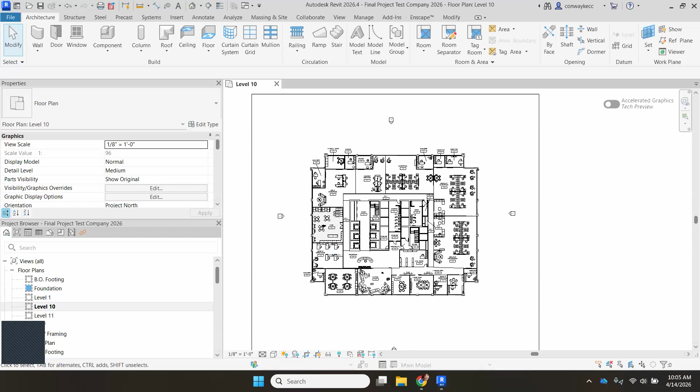If you've been following along and on track, you should have all your room tags in here. There is a kind of behind the scenes trick to copy and paste them if you haven't done that, but ideally you'll have all of your room tags on here. So it's a bit easier and faster and less work to set up your drawings. So we're going to check a couple things first. So first you want to make sure you're on an 1/8 inch scale.

Then we're going to put in a north arrow and a bar scale. Mine are already preloaded, but I'll remind people of where to go for that. So you're going to go up to annotate way up here. It's about halfway through in your toolbar. You're going to go to symbol. If you don't have it loaded already, you're going to go to load family. So mine are kind of going to come down here in this pop-up menu here. But if you need to load them, you're going to go to load family, click on that.

And then you're going to go to your annotation folder. So if you're not here at the root US one, make sure that you've scrolled back up to the US one, and then it's that first one, annotations. The two things that we'll need are right here. They're not in any subfolders. So what you're going to need is a graphic scale. So there's two ways we can do it. I'll put both in so you can see, but there's the GA graphic scale, looks like that. Then there's also the graphic scale for 1/8 of an inch.

Then you'll also need to add in the north arrow, and we have 3 options for that. Again, whichever one is your preference, they're all correct. So mine are already loaded, so I'm just going to hit cancel. So the first one we'll do is the north arrow. Here's the one I picked. I'm going to put it kind of over here to the left. Now, when you go to do your floor plan, you're going to need to leave some room for dimensions, so you might have to move this around later.

I'm next going to do the graphic scale. I'm going to show you both of them here. So to do this again, we're still on annotate. We go over to symbol. Now we have the drop down menu over here. Here's the 1/8 of an inch scale one. So some people are putting it just like right there. Then I'm going to show you the other one because there's a slight difference in how you have to force it to be an 1/8 of an inch.

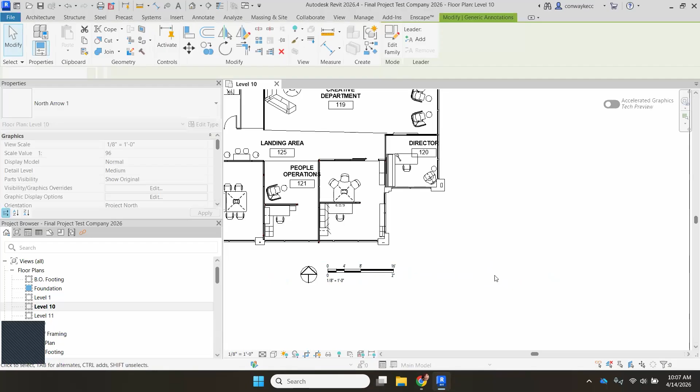And then now we have it an 1/8 of an inch. So whichever one is your preference. I just like this one, but both are fine. So whichever one you want. You don't need 2 of them. You're just supposed to have 1. So put that there. Then there's a few things we're going to clean up.

So if you zoom in here, these are the room separators to make my room tags. So I'm going to click on one, right click, and say hide in view category. This is a newish model that I've been updating. So the next thing we need to hide is the flooring. I only have like a sample flooring in here.

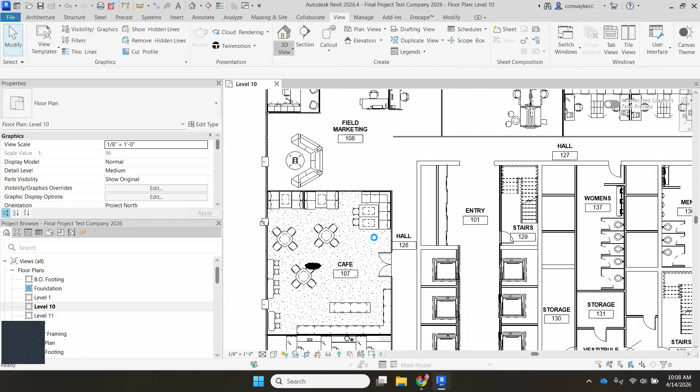There's a couple ways to try to get it. You can kind of hover around. Some people have carved up their flooring in really neat shapes, so sometimes you can get it that way. In my case, I'm going to kind of go into a view here. So this is kind of one of the roundabout ways to do it. View camera, go from here to here. Try to get where you're looking like out a window, because then you can get the edge or perimeter of your flooring here, and see how I can kind of hover, and now I've got the floor.

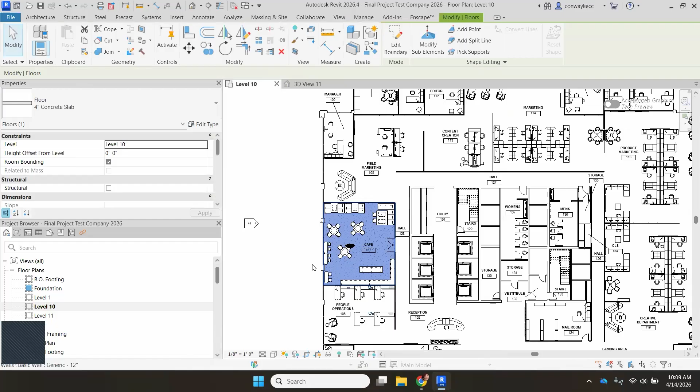So I'm going to go back to level 10. It's still lit up. I'm going to right click and say hide in view category, and now all of your flooring patterns should be hidden, because for this project, we are not doing a floor finish plan. We did it for project one, but for this one, we're just doing our construction stuff.

The other thing to note is just look around for any oddball stuff. So this is like a light fixture I was helping another student with. So I'm gonna just hide this one also because we don't want this showing up in the plan. So we're gonna say hide in view category, or actually for this one, element, just because I think whoever built this, they might have made it as a furniture. So eventually we're gonna say hide in view element.

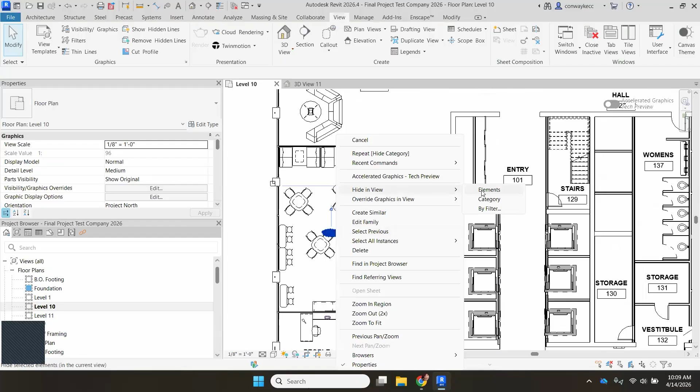I want you to also hide any of your plants, any like little area carpet rugs. A couple people had furniture and office sets that came in with a little area carpet. Hide that. Again, depending on how they've coded this, your plant may have been coded as furniture. So then you're going to have to go around and hide it by element, meaning an individual element.

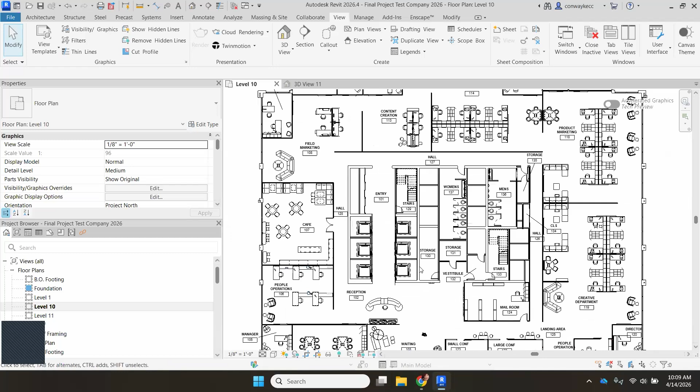Actually, here's a good example of these guys. This is a couple Enscape things. So I'm going to right click, hide in view category. I think it will get rid of all the Enscape stuff here and also here. So if you've already started putting in some Enscape elements, hide those also. So now it's basically as clean as we want it to be to start making some copies.

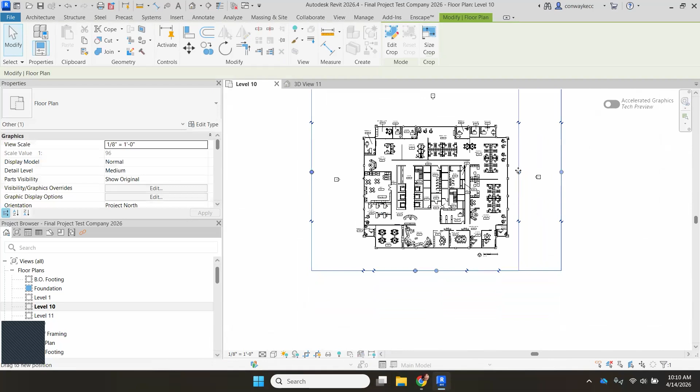I'm gonna, while I'm here, kind of pull this crop box in a bit more because we're gonna eventually need to have them all kind of edited. So I'll take the time to just sort of crop it in a bit more here. Note that when we go to put it on our sheet, the top and the bottom are pretty tight. Left and right, you have more space. So I'm gonna go like this, pull it in here, then pull it back over to the right. I'm going to tighten up the bottom too, but we'll pause that so you don't have to wait for things to save.

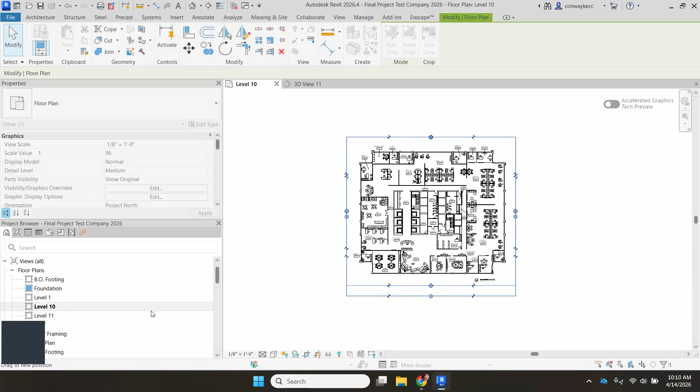Okay, so now this one, I'm going to leave this border on so we can see it, but now we're going to copy this twice to make our floor plan and our furniture plan. So for level 10, we're on it now. We're going to right click and we're going to pick duplicate view, duplicate with detailing, the one in the middle. A couple folks tried the as dependent. That creates a bit more headaches when things are edited. And so that's not what we want right now. We want duplicate with detailing.

And then it's going to come up just over here as like a new drawing. Now, so it's level 10 copy. So you're going to rename it and you're going to make this first one all caps floor plan. All right, so we'll kind of click off of that for a minute.

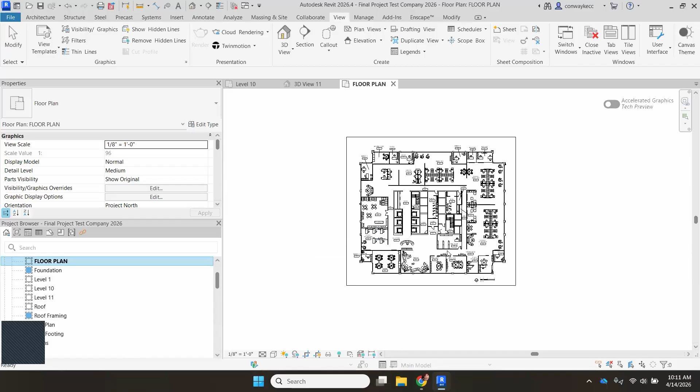I'm on it here. So for the floor plan, we want to now turn off all the furniture. So there might be a couple categories. So they might be under furniture, they might be furniture systems. Basically, you want everything turned off except any of the cabinetry in your kitchen or any cabinetry that might have sinks.

So for your mother's room, you might have a kitchen cabinet with a sink. That's correct to have on this plan because the plumbers and the folks who are coming in on the first wave need to know where these things are.

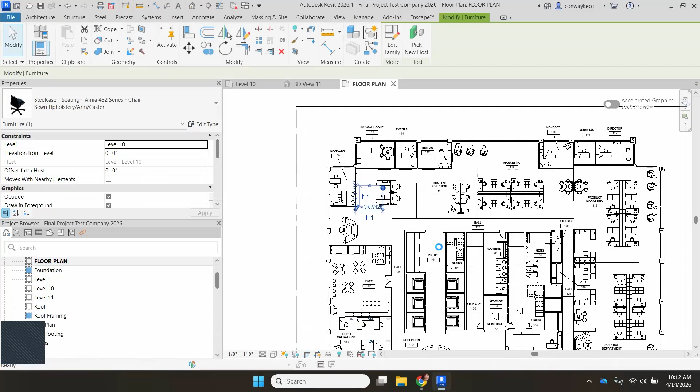So first I suggest is click on a chair, right click, say hide in view category. And on mine, you're going to see a pretty good amount of stuff disappear, well, actually pretty much all of it. So if you have other things still floating around like tables and chairs, they just might be categorized in their own separate subcategories. So you're going to hide that too.

But this is what it should look like, pretty blank, because this is now the plan that you're going to put your dimensions on. So for my students this semester, we did all this work on Monday. Their first round of draft dimensions are due Thursday. So we expect at least half of the building done, so I can give you some feedback and then you're able to finish them up on your own over the weekend. But you need to dimension obviously all the outside rooms and areas.

The other thing to make sure of is we need all these clearances here. You also should be dimensioning the length of these walls. So the clearance, the length of the wall, the clearance, how far away this wall is from an exterior wall or another solid wall. There's a couple quirky things on here too, so just go in and look and see what that is. You might need to hide it.

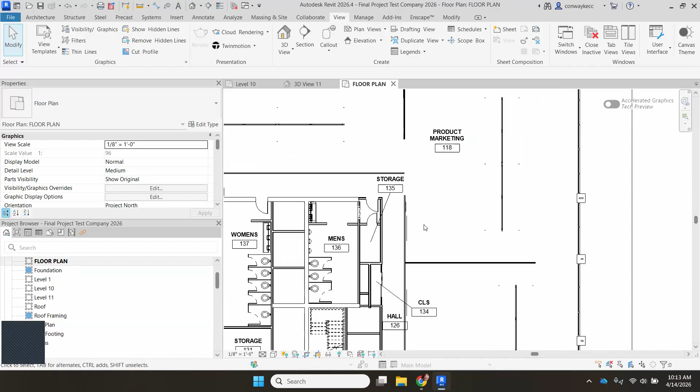But again, usually I tell folks to start in the top left corner and work your way around clockwise, but be really methodical. Again, more dimensions are better than less. You do not, however, have to dimension anything in this core part of the building because this already exists. You're not changing it as the tenant, so all of this stays just as is.

You're not dimensioning anything. You have added some doors and things like that, so I would add, obviously, the corridor width here, but you might actually be adding in some notation about the door too. We'll talk about that more in class. All right, but this is kind of the guts now for your floor plan. Now, I'm going to tighten this up even more. When we see it on the plan, you're going to see it's going to get pretty tight.

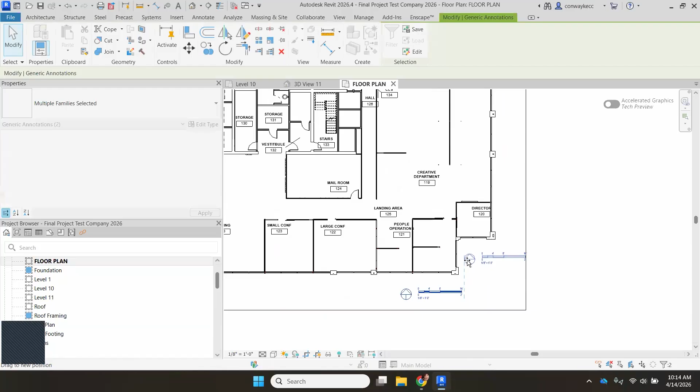You might want to move, we kind of discovered this in class, this setup over to here to the right, and then we'll watch where it's cutting off, because once we got it on the sheets, we were able to see how much space we have left. So for now, for this stage of the project, leave this crop box on until you're done with your dimensions. Then you're going to turn it off. I'll show you how to do that next in the furniture plan, so we'll set that up together too.

All right, so now you're going to go back to level 10. You're going to right click. You're going to say duplicate view, duplicate with detailing. And then it should already have the north arrow and the bar scale. And in this case, I might just leave it there. So here we have the crop box on. We're going to crop this as tight as we can here, to the right and the left really tight too, because this plan is now all done.

If you do have plants, I want you to turn the plants off and the rugs because they are not part of our furniture plan. They're more of a decorating aspect that you'll bring in after all the furniture companies have been in and unloading their stuff. So this is really the map, not only for the client to see where things are going, but later down the line as furniture gets delivered, so folks know where to put it for you.

All right, so for this one now I'm going to turn off the crop box and we'll later on see how it fits on the sheet, but we can come back and turn it on and off. All you do is just click the little button to the left of the eyeglasses. And now this is all clean, ready to go.

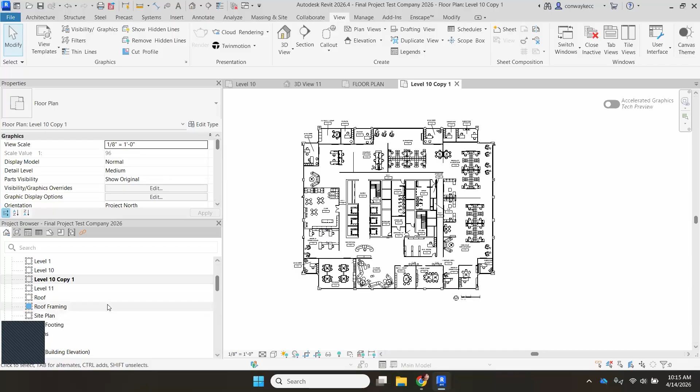All right, so before you leave this one, make sure you also rename level 10 copy. So that's going to be right click. You're going to hit rename. You're going to put it all in caps. So it's furniture plan.

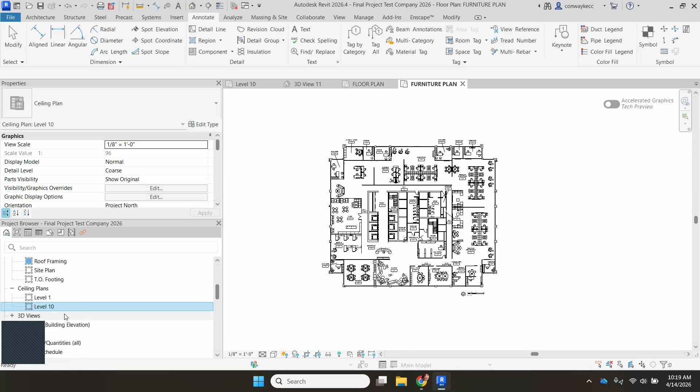All right, now we're going to move on to our reflected ceiling plan. So I kind of have a couple down here. So let me just get rid of this one that we did in class together. All right, so for this one, I'm just going to close these guys up now just so they're out of the way. You're going to right click on level 10 and say duplicate view, duplicate with detailing. And then we're going to get a duplication of your reflected ceiling plan.

Before we leave that one, right click and rename it RCP. So I'm going to click rename and then RCP in all caps. What we were trying to do in class is some people tried to rename this RCP, but then what happens is it renames your level 10 up here because they're linked. So Revit has a reason for having these things labeled as they are. So you're supposed to be making a copy of this.

So here's our reflected ceiling plan here. So if you have a lot of stuff floating around in the outskirts here, you might want to delete that. Or you might want to make sure, like I said, when we crop it, it's over here, but just keep an eye on if you have a lot of stuff. I'm going to leave mine there for now.

All right, you're going to go to the left of the eyeglasses again, turn on the crop box, just so we can kind of see the border we're dealing with. Mine's going to be pretty big because it's trying to be helpful and be like, hey, don't forget this stuff over here. So I do want to pull this in a lot tighter.

One thing to note is where these little elevation markers are, they were sometimes giving us some problems in class. They sometimes override other settings because Revit sees them as something that's very important because it sets up all the exterior elevation views. So what we were finding is if we move them in close, like about here, and then we cropped it, they weren't giving us as much trouble. So they're not showing up on our plan because we shouldn't be seeing these symbols on our plan, but we want to bring them in a little bit tighter.

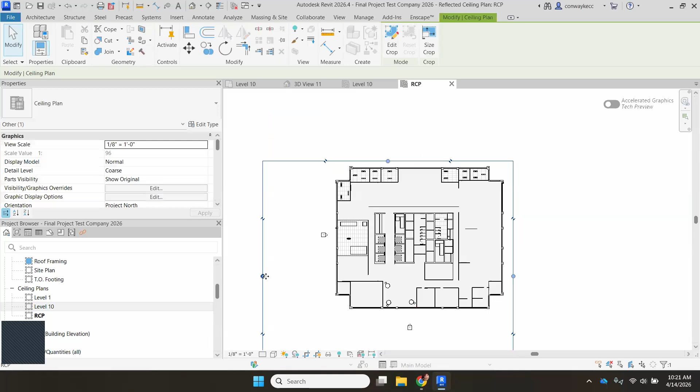We are not expecting you to dimension this plan this semester. Some semesters we will have you do that. Again, we're running kind of tight on studio time this semester. So there's a couple things we're kind of letting you get away with. You will be doing a lot more dimensioning in your lighting class in the fall semester. So that will still be something that you'll be learning and going over with Anthony.

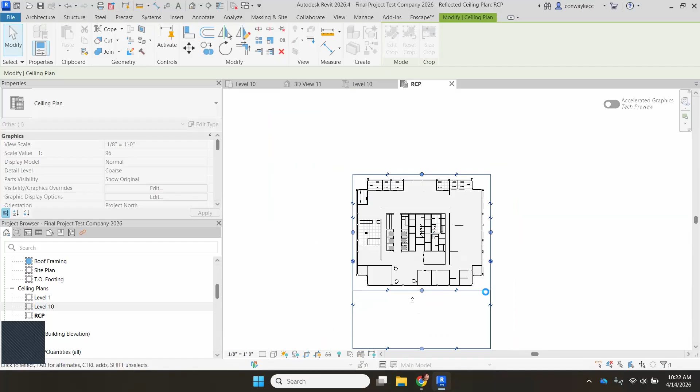All right, so now it's pulled in tight. And then before we leave this drawing, we need to put in the north arrow and scale here too. So I think I have enough space to park them here. So I'm going to go to annotate, then to symbol. And then I'm going to put my north arrow in first. So it's right here. And I'm going to stick it here. I might need to pull it over to the right a little bit more, but we'll check that in a minute. Then I want my graphic scale.

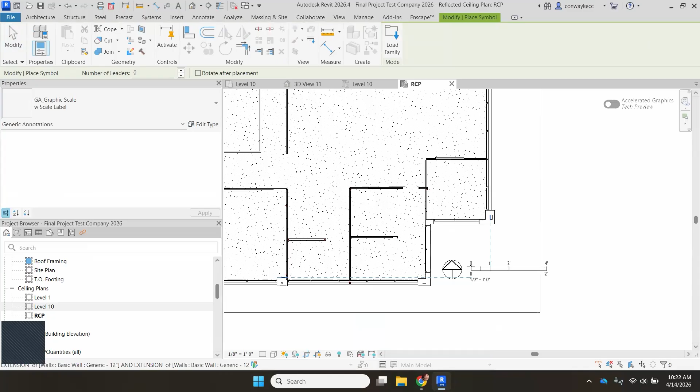So I just visually like this one a little better. Yep. So first we're going to make the crop box a little bigger for it. And then we're going to update the sizing of that so it reflects that it's 1/8 of an inch. So we're going to click on it, and instead of 24, this is now 96. We're going to apply, and then we're at 1/8 of an inch.

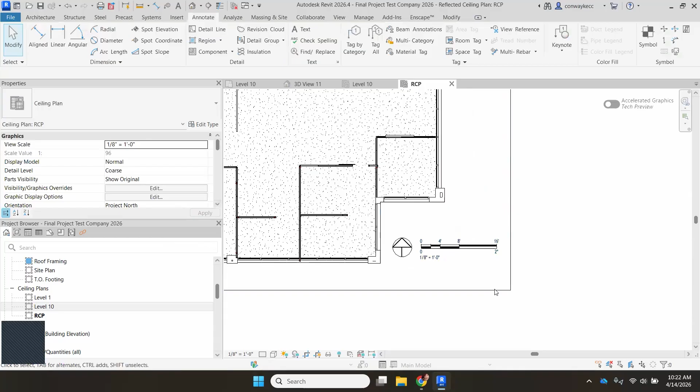Now we also want to turn this crop box off. So then we go to the left of the eyeglasses, click the off symbol. Now it's all clean and ready to go.

All right, so those are the 3 drawings we need set up for this semester, 2026. In future semesters, you might also have detailed plans like enlarged floor plans. And again, I'll make updated videos. We also have some old videos that can walk you through that. But for this year's class, these are the 3 that we are printing. So I'm going to stop this video and make a new one, and the new one's going to be how we put it all on sheets.